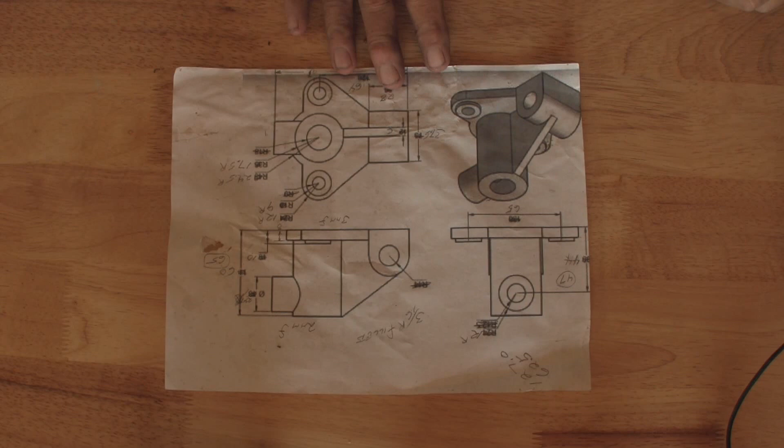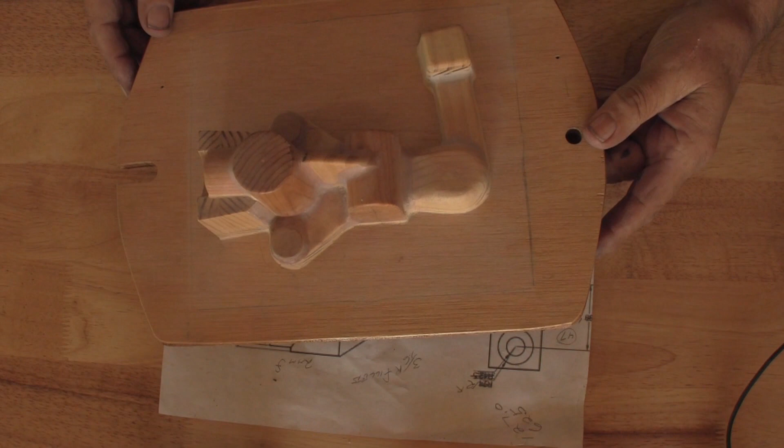So we started out with the drawing, made corrections to the drawing where it was needed. Now you got to realize the part I made is about half the size of what's on here. That's why all the dimensions have been changed. So we started out, we had a wood pattern like so, mounted on a board, match plate if you prefer, fully gated, and that included

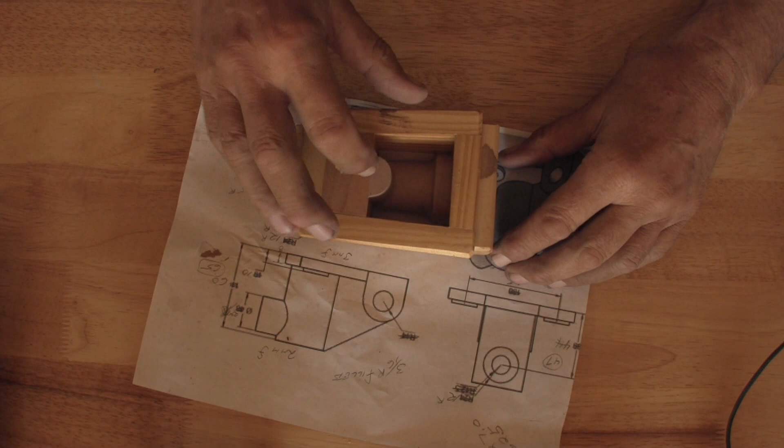one core box with one core out of there, a loose piece, and I was able to make a casting with it. So in the process of doing that, I came up with the casting. Looks like so. Gating is still attached to this one. Marks on here is how I'd go about inspecting the casting to verify that the casting was good.

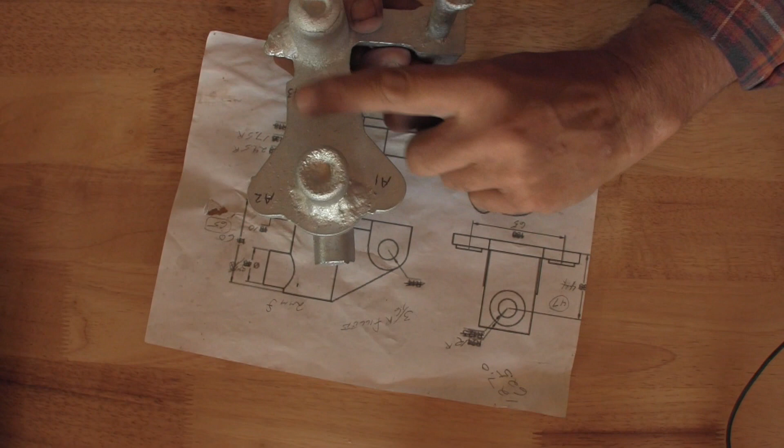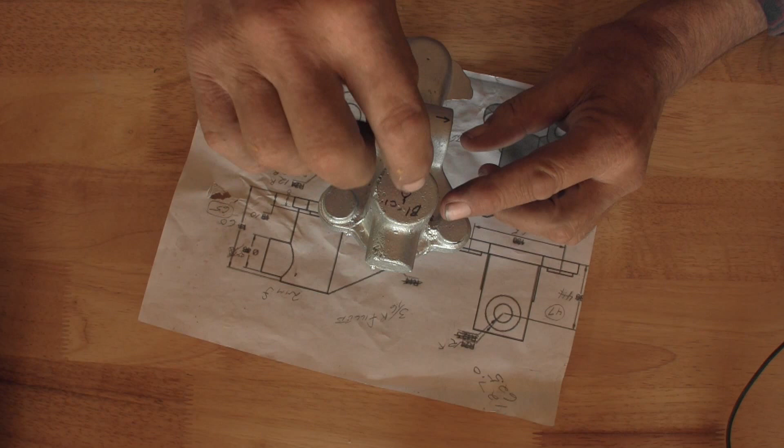3 points on datum A. Center of this boss would be datum C1 and B1. Centered between these, the midpoint between each side here would be B2. So we stop the plane from rotating here. We stop the rotation about this axis here because the axis system is in the center of this boss. And we locate it with C1 still being the center. So that all works.

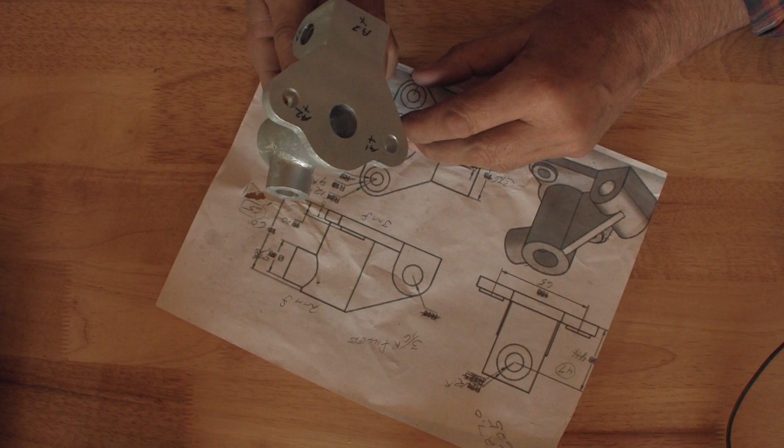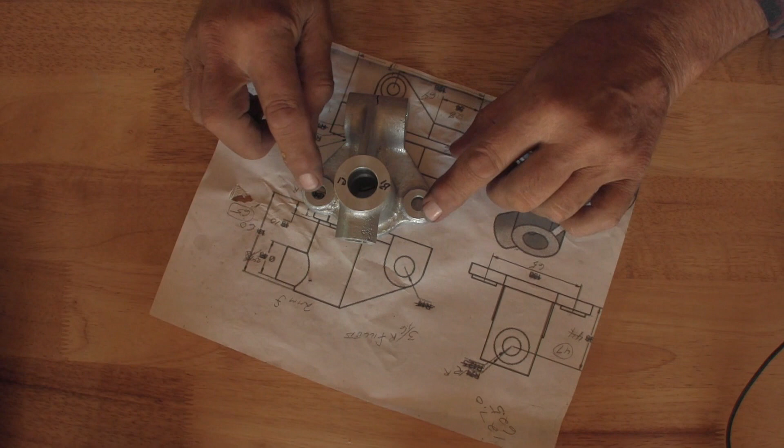From there, we went and got a finished casting. Completely machined. Same thing. If I had to inspect this part, now I'd use the machined side as datum A. I'd use the center of this hole as B1 and C1, and the midpoint between these two surfaces here as B2. And I am able to check this hole and the hole through the center here. So that verifies that the casting would be machined properly.

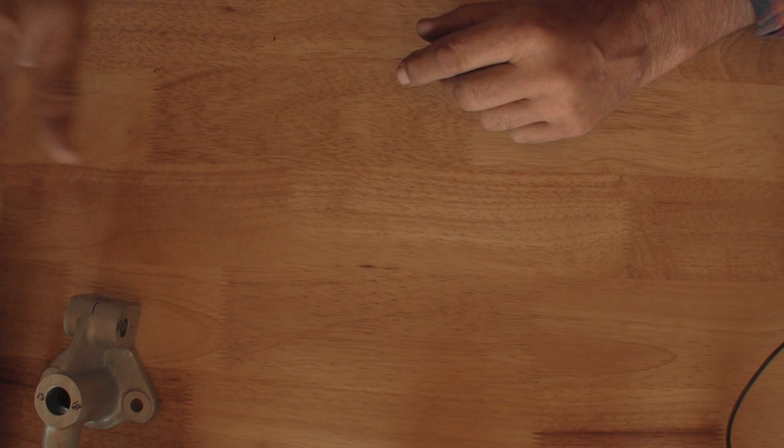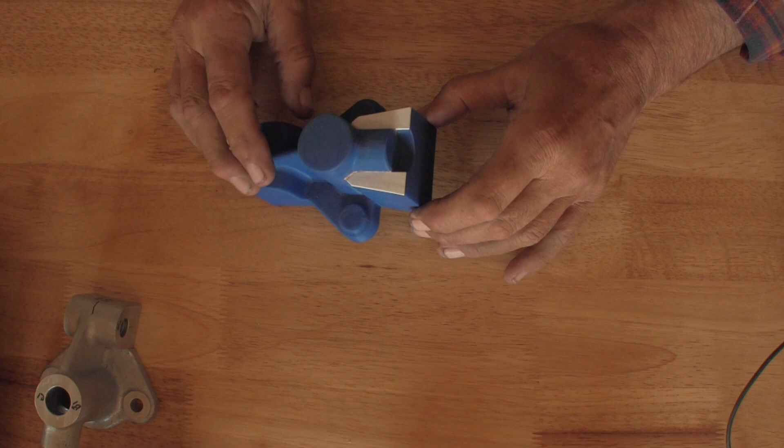But in the process of doing this whole project, I made the wood pattern. That's where I got my castings from. I made 2 patterns like this. First one I just stuck with the standard settings on my 3D printer. And this, I think I mentioned in another video, was a mistake. I'm using constraint-based software, and I had this height here constrained to the wrong location, and I put too little machining on here. I was short a millimeter, so I had to add a millimeter here when I 3D printed it.

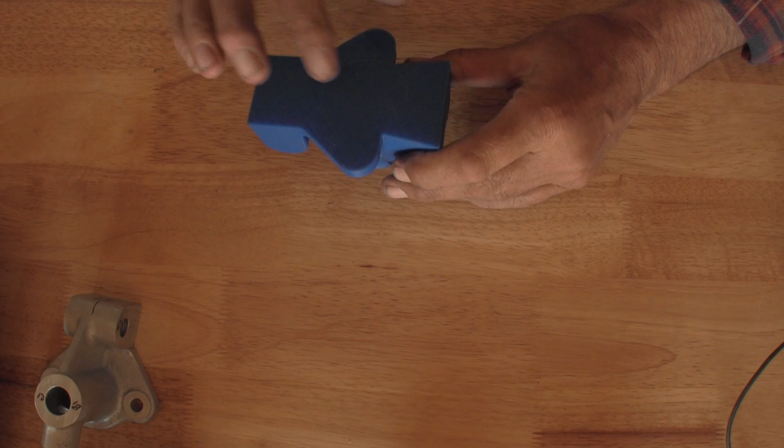The first one of these I made that was also blue, I did a self-destruction test on it, and it failed. You might have got one casting off it, as long as you didn't beat it up too bad. This one has another problem on the back side I'll get to in just a second. So that was 2. So this was the final one on that. I got the pattern.

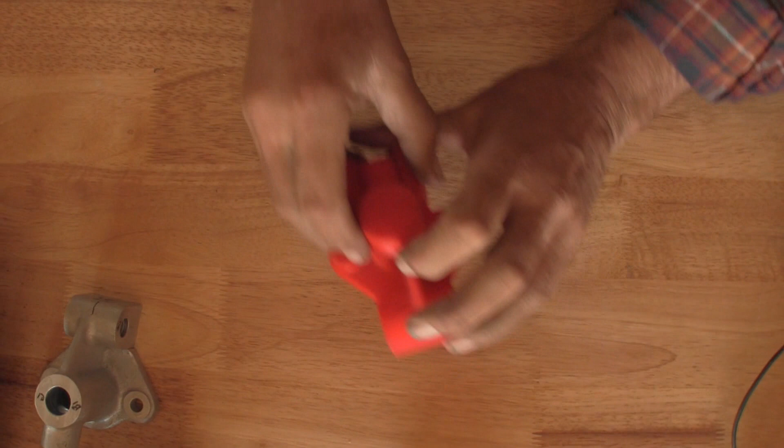What I did with this is I increased the number of shells, and I increased the top and bottom layers. I now got basically a pattern that I think would hold up to a little bit of foundry use. I increased the infill in here to make it a little stronger, and I added these holes in here. So I got enough material around each one of those so I can put a riser here and here if I choose to use an open riser, which I should have done on the casting I got. And then I can use these holes to draw the part out of the sand if it's a loose pattern. Otherwise it should be mounted.

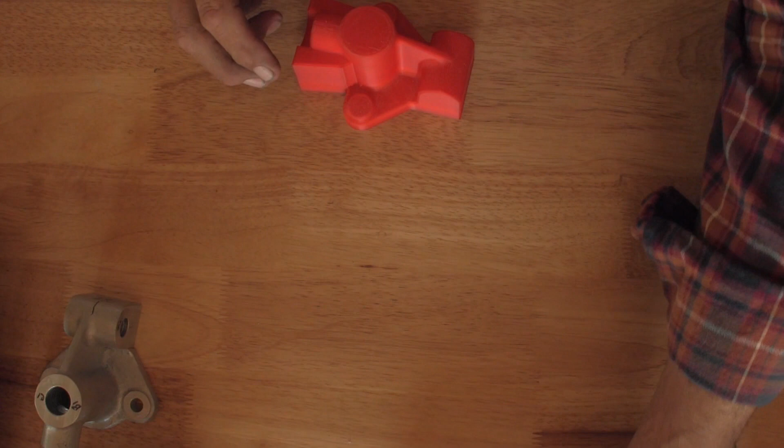And in that process I also made a core box. Difference between the core boxes, this one comes apart this way, and this one comes apart with the loose piece here. It comes out that way.

Each way works. I prefer this method. If you put the pattern in storage, you can tack down a block of wood over this, keep the loose piece in there. Most times when this is put in storage, it's put in just like that and pieces could be lost, especially on a small part.

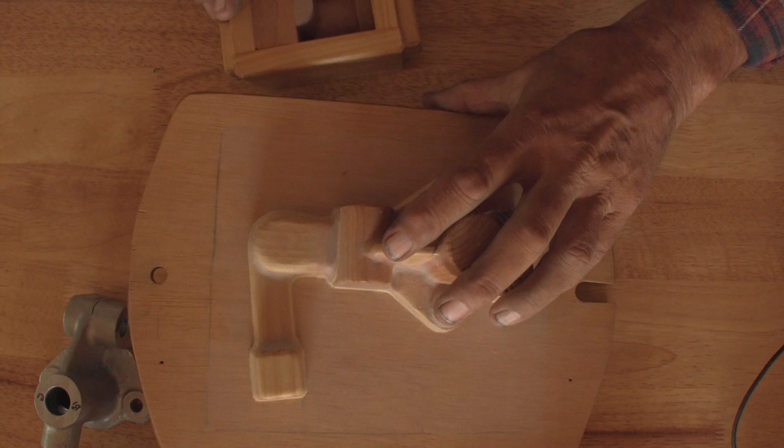But it's a small foundry what I got here, if you want to call it a foundry, so that doesn't really matter. Now when we get to the castings, let's see. No, actually that's about it. That's the whole process. Now, if you happen to believe like I do, time is money. This whole project here, if I didn't have to make videos, this whole project with the core box mounted and gated is about a 12-hour job maximum.

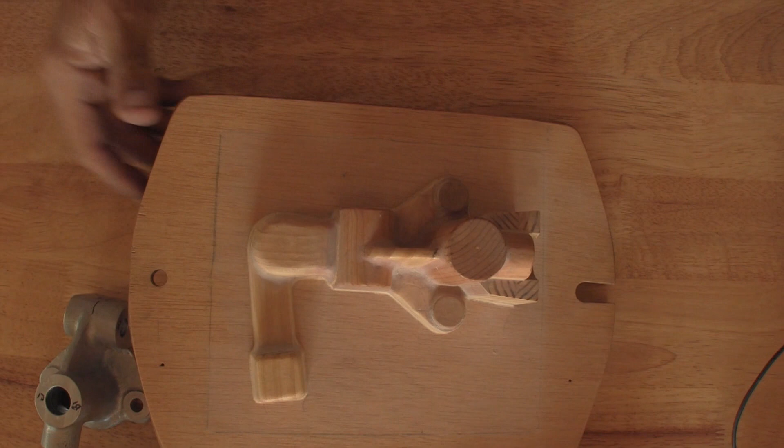Ignoring the rest of the tests I did, just this part here, designing the pattern, getting the core box, printing the part. I got better than 12 hours designing the part and core box on the computer. Each one of these took almost 8 hours to print, but looking at the way the part's printed, this one printed with the layers going this way, so this will draw out pretty easy, because if you hear it, that's roughness.

You can't have that roughness coming up a vertical wall. If you do, it's not going to draw out of the sand very well, if at all, without tearing it up. This part was printed like that, so I got the same problem here. I got basically a whole series of undercuts all the way through it. So this would all have to be cleaned up, painted, sealed, and made sure I got a smooth surface to draw it out, because I got very little draft here. I got less than a millimeter draft on these sides, and that's the same on the wood pattern too.

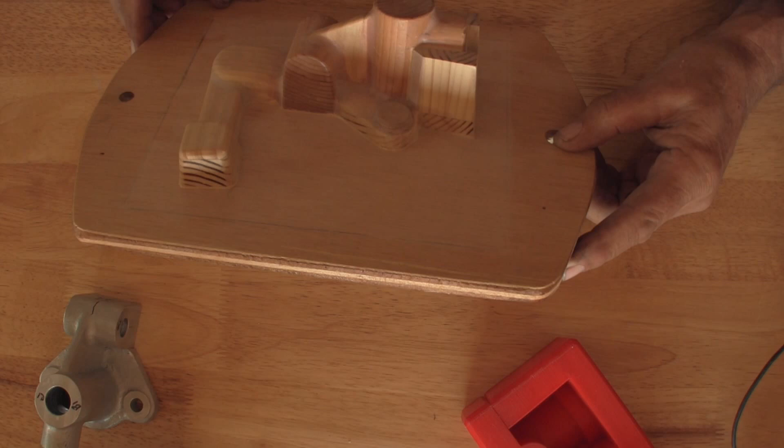So it depends on how you feel about printed patterns. In some cases they work, in a lot of cases they're very good. And with the new technology that's out there, if you're in an industrial environment, they're extremely good. But if you're the backyard metal caster and want a quick and easy way to do things, actually learning how to build a simple wood pattern, like so, doesn't take that long, it's easier to do.

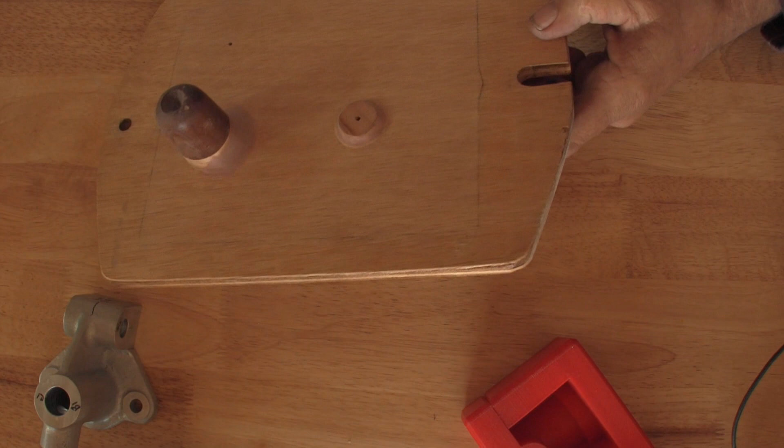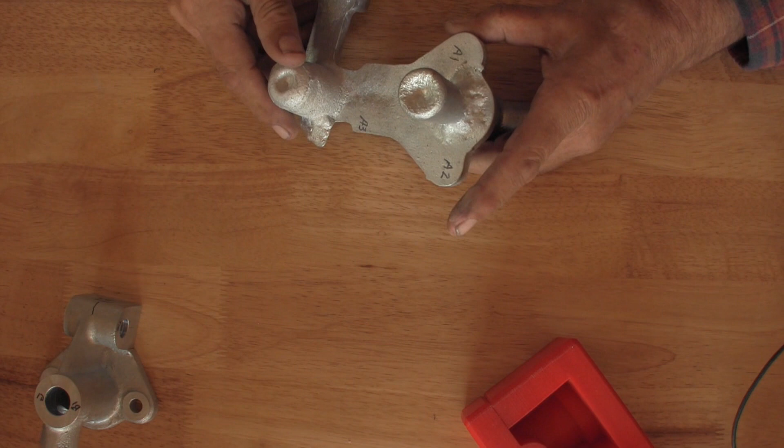I prefer all my patterns mounted to a match plate, and I put a small fillet around the whole thing all the way through. I used obviously a blind riser here, open riser there, and the mistake with doing it that way, I'll show you in just a second, is with this part I could maybe get it to clean up, but I got shrink right in here. Part of that is I didn't put a big enough fillet here, so what I needed to do is put a bigger fillet in here, which I did to get the other casting. I brought it out almost to the edge of the casting, and just a bigger fillet.

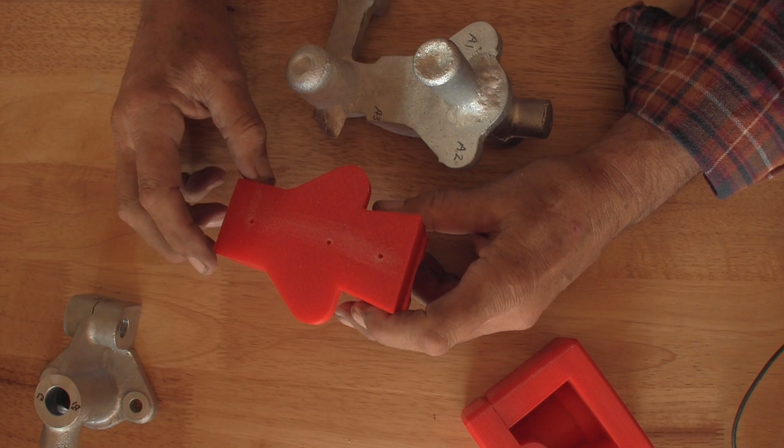What would have been better is an open riser, and I could probably leave it in the location, or I could do like I said on this one. I could put a riser here and here, and I would have made it with a pad, a neck down riser, so I'd have a pad here and put a neck down riser on it. So that's my views on it.

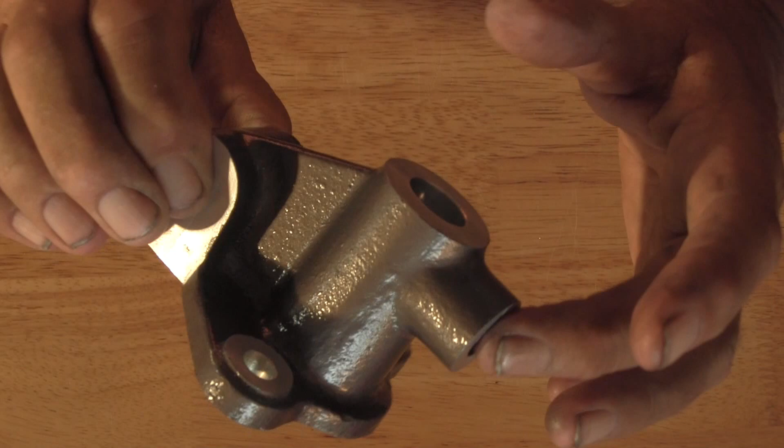I was gonna say, there's one thing I forgot. Once you get a casting done, painting it hides a whole lot of imperfections, makes the whole thing work and look good.